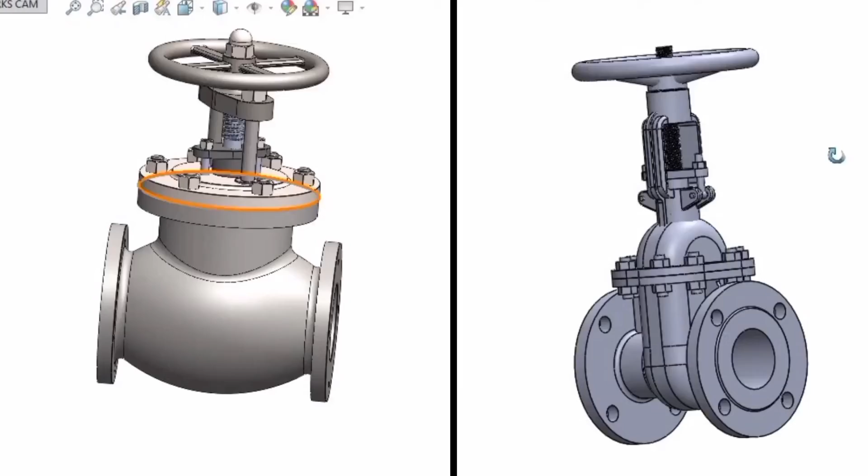In this video, we will see the gate valve and the globe valve side by side. We will have a look at them, we will compare them, and we will see the differences between them. So let's begin. First, we will see the gate valve, and this right here is the gate valve. So I will try my best to rotate it and show all the parts of the gate valve to you.

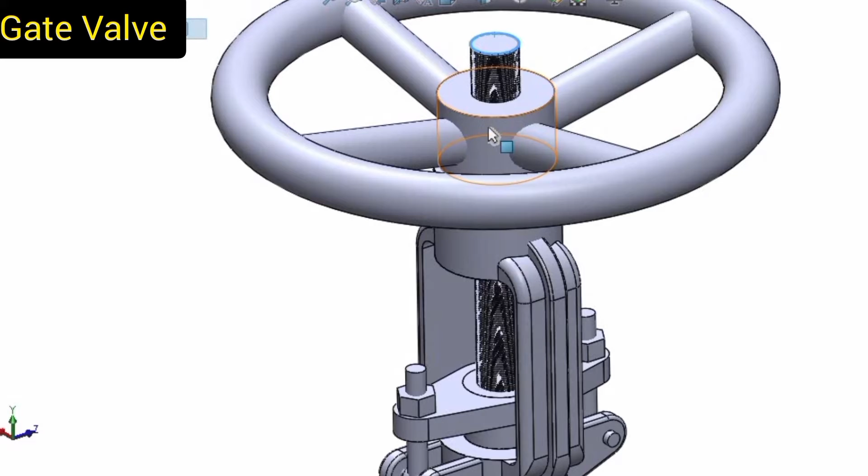We have a handle and a stem here. So this right here is the handle and this is the stem. When we open the gate valve, it comes up. Okay, so this is the handle and this is the stem. Gate valves come with these two flanges. This is one side of the flange and this is the second flange. And here we insert the bolts in order to connect the pipes or different fittings with it.

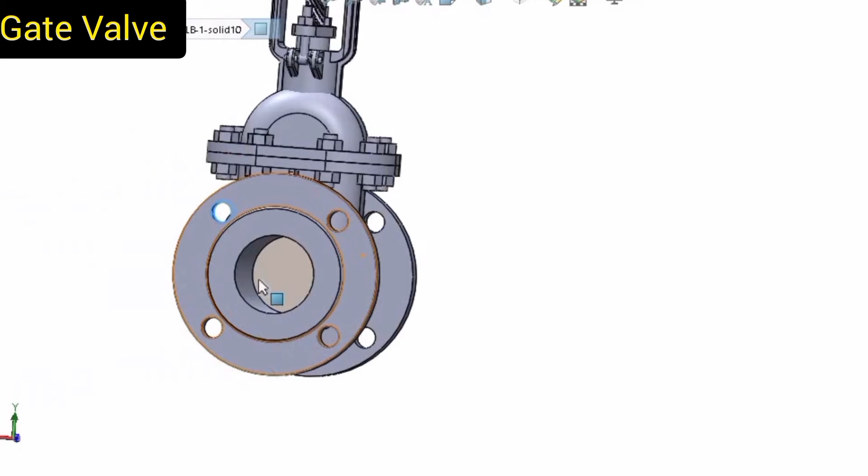And this is the main part of the gate valve. This right here is the gate, and this goes up and down in order to open and close the gate valve. Now let me show you the valve in different orientations so that you can have a good look at it.

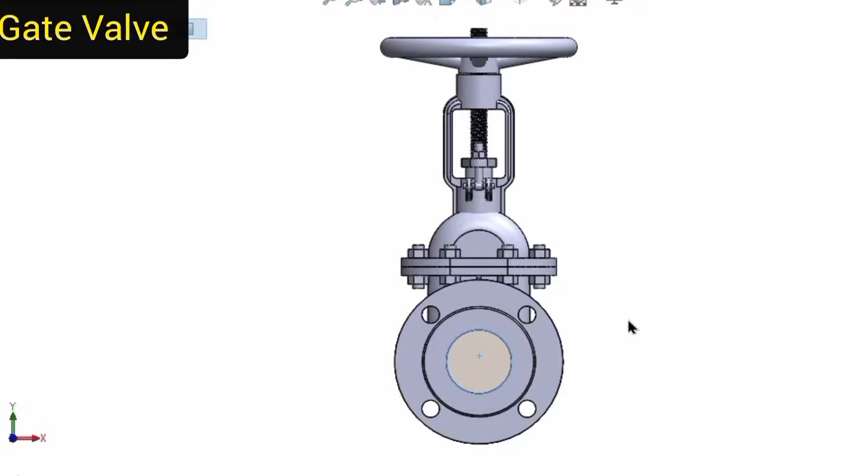Now moving on to the globe valve. This right here is the globe valve. I will show you the mechanism, how it works. First have a look at it, and now let me hide this body to show you the disc and how it works. So this right here is the disc. When we rotate this wheel of the valve, it goes up and down. So let me rotate the wheel, and here you can see it goes up and down.

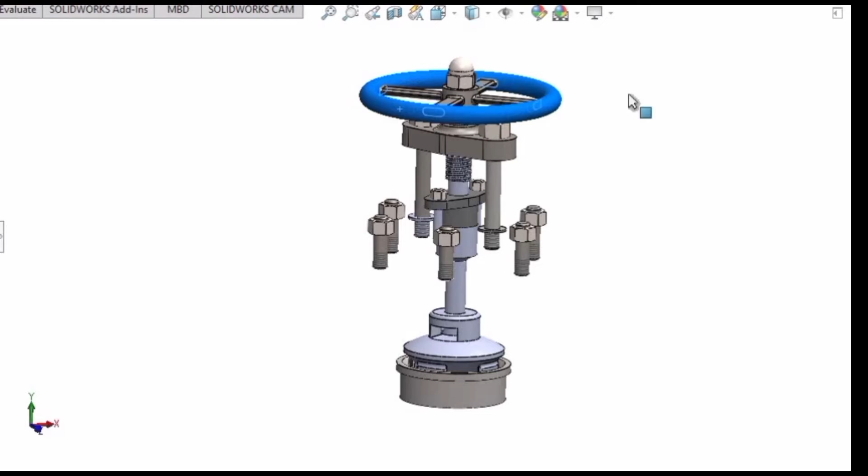More rotation, and here you can see there is a gap, and from this gap the liquid or fluid will go through the valve. And now let me close it. Now I am closing the valve by rotating it in clockwise direction, and now it's closed. So that's how it works.

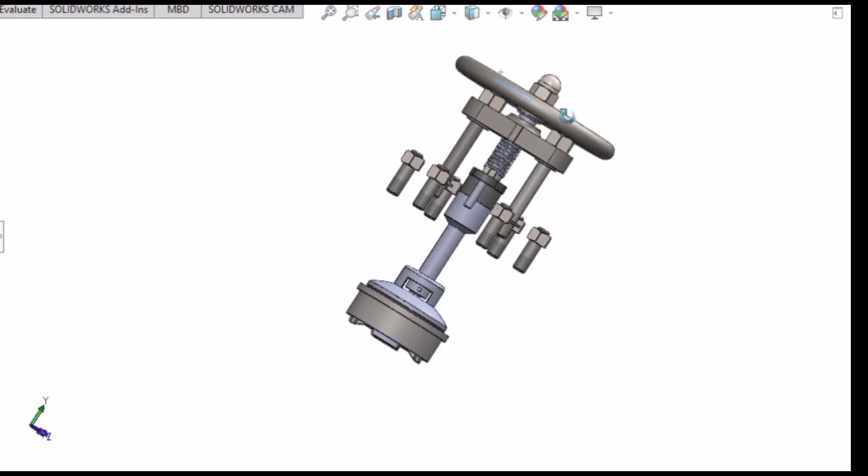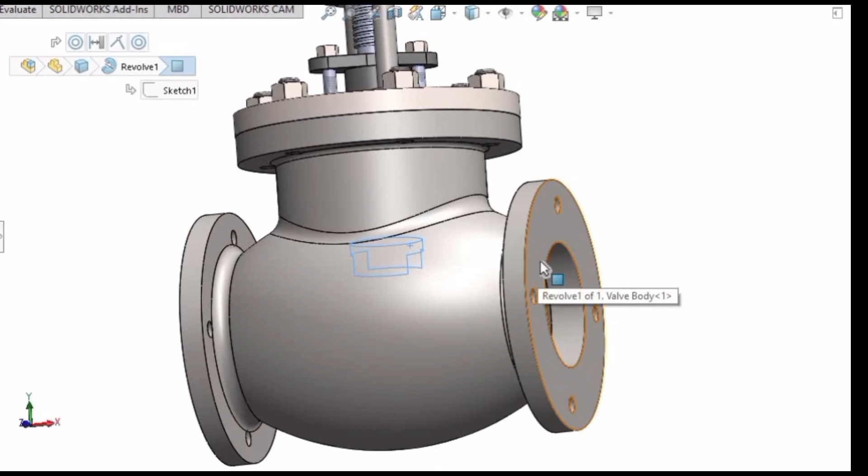Now let me show you the body of the globe valve again, and this right here is the gland of the globe valve. This is the gland and this is used to prevent leakage from the globe valve. By default, the globe valve comes with these two flanges. By using these flanges we connect the pipes, and this is the body of the globe valve. It looks like a globe, that's why we call this valve a globe valve.

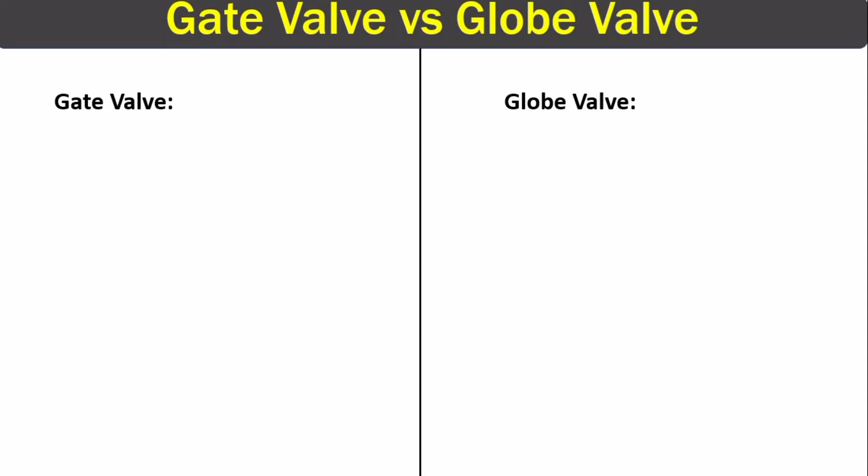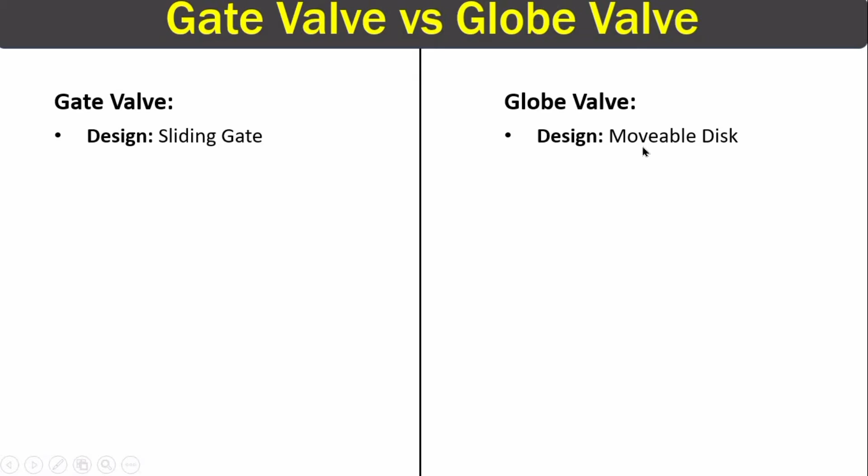As you have had a good look at the gate valve and globe valve, now let's see the differences side by side. First we will see the difference in terms of design or mechanism. Gate valve has a sliding gate mechanism. The gate will go up for opening and will go down for closing. But the globe valve does not have any gate. It has a movable disc. Yes, it goes up and down, but it has a different mechanism than the gate valve.

Next difference is pressure drop. So which valve has more pressure drop than the other one? Gate valve has less pressure drop due to its sliding gate design, but the globe valve has high pressure drop due to its design. This is a negative point for any valve, that it drops some of the pressure of the system due to its design. Third difference is in terms of application. Gate valves are used on low pressure drop lines, and globe valves are used where change in pressure is required. Change in pressure means to regulate the pressure.

Moving on to our fourth difference, that is flow direction. When we install the gate valve, there is no problem. It can be installed in any direction. But when we install the globe valve, we have to look at the direction of the flow of the fluid and then install it. So we have to be very careful when we install the globe valve on any pipeline, because we have to match the direction of the globe valve and the fluid direction in the pipeline.

Next difference is in terms of structure. Gate valve has a simple structure, but globe valve has a complex structure. Next difference is in terms of control. Gate valve is mostly used for opening and closing purposes. There is no use for regulating purposes for the gate valve. But the globe valve can be used for regulating flow rates. Regulating means if I have 100% of flow and I want to reduce the flow to some extent, like 50%, 30%, 20%, I can do it with the globe valve. Globe valve is best suited for regulating purposes.